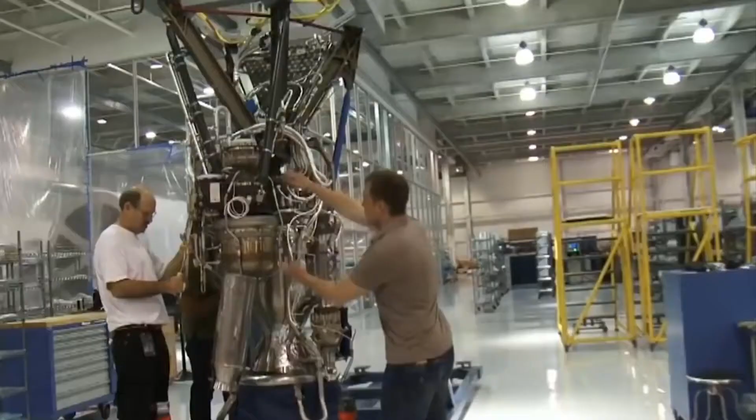Tesla and Elon Musk should be synonymous with the word electric. With the exponential increase at which electrical technology is being used to power almost every engine, we could have all forms of transportation transformed into electric. This would not exclude jet engines.

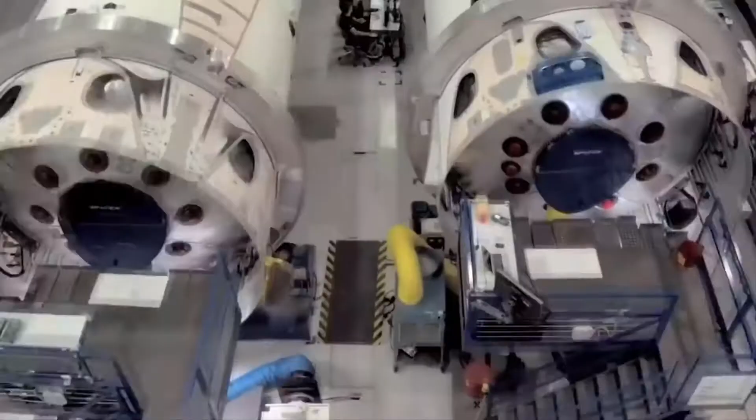Every environmentalist with a voice has had one or two things to say about airplanes and their jet engines and how they affect the environment. But today, we are not here to talk about carbon emissions or footprints. They are bad for the environment and increase global warming, but that is not the focus here.

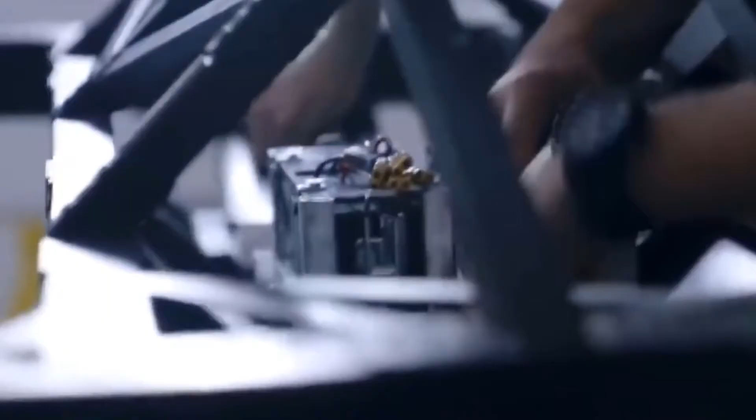Electric cars are the rave and focus for everyone right now. That might be because airplanes only constitute around 2.4% of global carbon dioxide emissions as of 2018. Transportation accounts for 24% of the total global carbon dioxide emissions, and 72% comes from roads. So in a bid to save the world and preserve the green, electric cars seem to be much more important right now. But it doesn't mean that the change isn't coming to airplanes and jet engine powered vehicles.

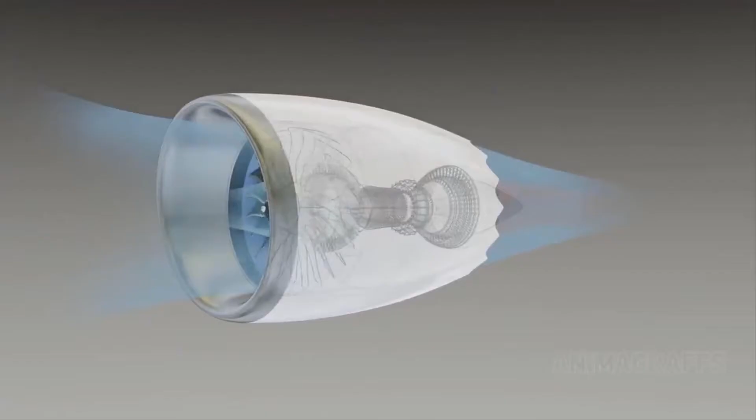How do conventional airplanes work? Regular airplanes are usually fitted with propellers, engines, and wings to generate something known as lift. The forces acting on a plane that could be manipulated to fly are lift, thrust, drag, and weight. The forward motion of the aircraft generates lift through the air. This forward motion is created by thrust from the plane's engines. So all conventional aircraft, helicopters, vertical takeoff and landings, jet airliners, or turboprops use combustion engines.

In electric planes, the principle wouldn't be any different. All that would change is that these combustion engines would be replaced with electric counterparts and batteries. Rockets used to launch satellites into space might still be running on combustion engines and principles because it requires a tremendous amount of thrust and energy to launch them out of the Earth's atmosphere. Trying to replace rockets with battery-powered counterparts would be one giant challenge.

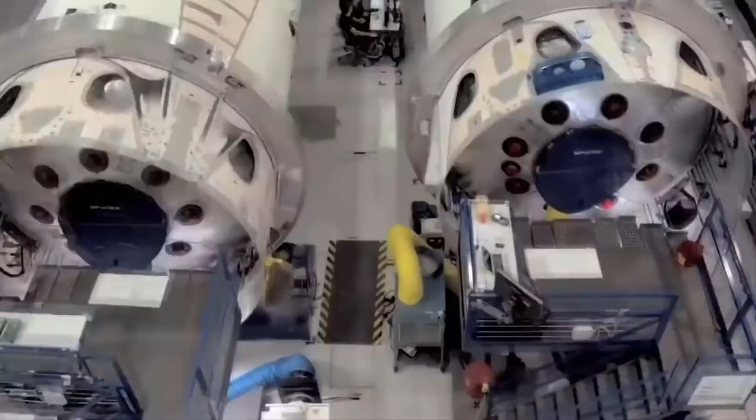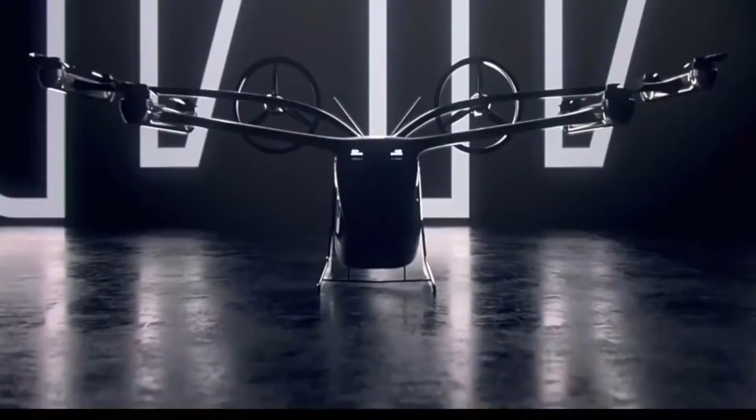Electric airplanes? Yes, this is possible. There are already electric airplane programs. While the programs might be far from introducing one into the commercial sector, electric airplanes are a thing. Electric airplane programs like Siemens and Magnus' E-Fusion, Pipistrel, and Alpha Electro all-electric plane are ongoing, and some even have prototype models that have been tested. For example, Harbour Air flew a fully electric seaplane for 15 minutes. This is the first step towards transforming its 40 planes. Electric planes are viable and feasible.

Elon Musk has made his intention to create or build one known since 2010. In his cameo in the Marvel movie Iron Man 2, he said, "Got an idea for an electric jet." Now this might have been a joke at the time or something he said to fit in the mood since Iron Man is all about futuristic tech, but since then, Elon Musk's company Tesla has been at the forefront of battery technology and has pioneered electric-powered cars.

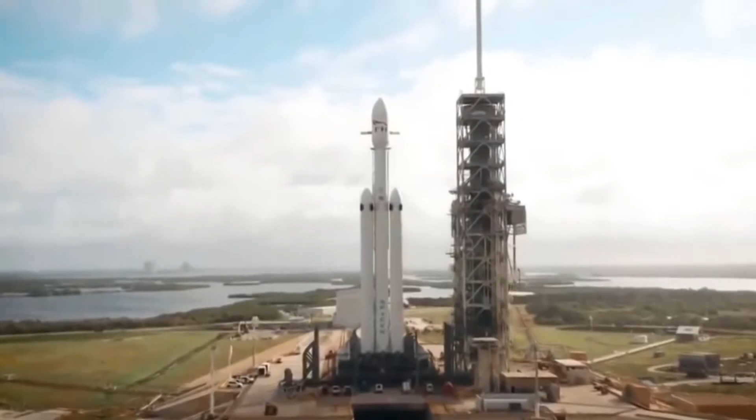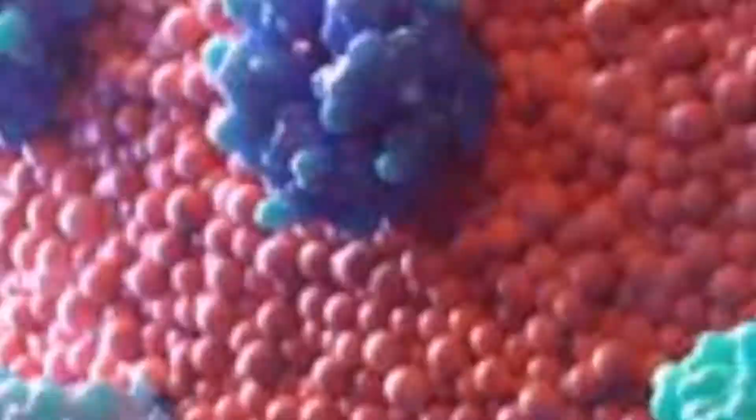So why don't we have electric planes yet? Cars already run on batteries. We even have trucks that run on batteries like the Cybertruck. So why can't we have electric planes like cars and trucks? Well, the answer is we aren't quite there yet, and the tech is still in development. When Elon Musk was asked about the potential advent of electric planes, he gave a timeline of about 4 to 5 years, and that was back in 2019. With the COVID-19 pandemic slowing down everything in general, we might have electric planes operating commercially in the next 4 years. So why don't we have electric planes yet?

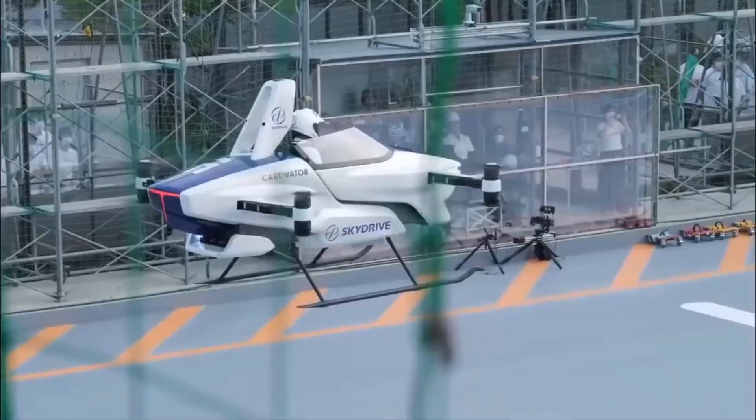Electric planes might have the advantage of being less noisy and having no carbon footprint on the environment. However, there is still a better and more sustainable technology. Combustion engines will still rule the skies. Combustion engines have an advantage over batteries that are currently in operation. This is because they can produce more energy density. The minimum energy density required to operate planes is 400 Wh/kg.

Most battery cells with high cycles have just about 300 Wh/kg, and this energy density isn't enough to fly electric airplanes. For batteries to be viable and cover the average distance combustion engines could cover, they would need to have energy densities higher than 400 Wh/kg. Tesla is at the forefront of battery technology, so it won't be a surprise if they come out with a battery that could handle powering airplanes. If Tesla does develop these batteries, it might make their cars last longer on the roads and have more mileage.

Is Tesla working on electric airplanes? Tesla is a company focused on bringing electric vehicles to everyone's doorstep, and their partner company, with which they share the same CEO, SpaceX, is heavily invested in aerospace technology. With their success with all the electric car models, Tesla does seem to be the right company that would pioneer the electric airplane. But sadly, that doesn't seem to be the case.

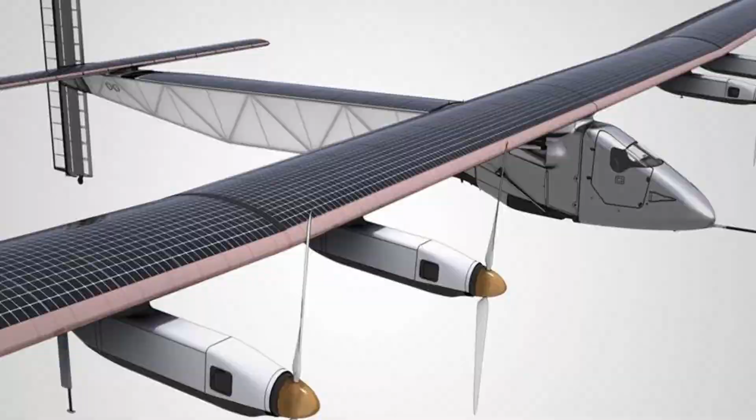Other companies seem to be way ahead of Tesla and are producing or working on these electric planes. Most of them are unveiling electric VTOLs and even showcasing working prototypes of some of their models. As of 2017, we already have an electric aircraft that circumnavigates the world. The plane is known as the Solar Impulse 2, and it has made history. So far, Tesla hasn't made any plans or announcements with regards to electric airplanes. They haven't even released renderings for a design. In 2019, a commercial electric-powered test flight did take place in Canada with Harbour Air.

If Tesla is working on an electric airplane, there is so much excitement about developing one that it can't be kept under wraps. It seems Tesla is focused on developing their electric cars and making them last longer on the roads. Elon Musk has expressed his intentions to create electric airplanes, but he cites that the battery technology is not available for volume production yet.

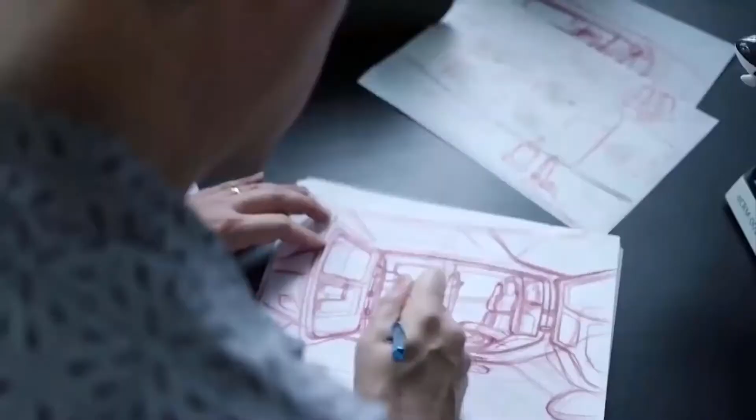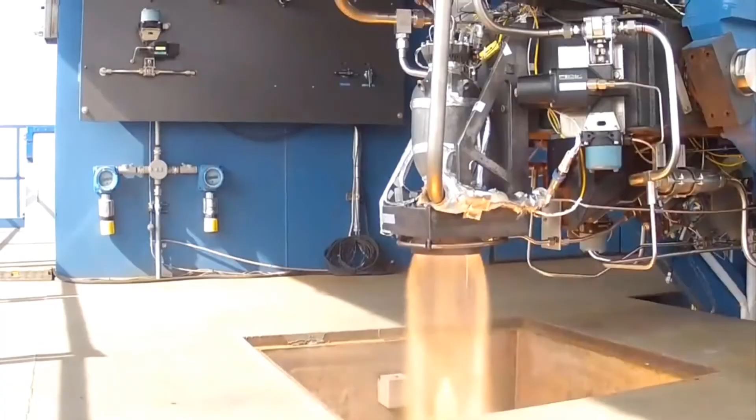There has been chatter on Twitter regarding the movement of a company, Amprius, from their location to just a few blocks away from Tesla's Kato Road facility. This company specializes in silicon nanowire technology that is vital towards creating battery cells with high cycles. And while this might seem to be a move to facilitate collaboration and produce batteries with higher energy densities, Tesla doesn't seem to be working on any other technologies that would go into building an electric airplane. The systems are so complex that just having a battery ready isn't everything they need. They would then need to design more efficient engines, bodywork, and test out a variety of different things. All of these technologies could be worked on while Tesla keeps improving its battery energy densities.

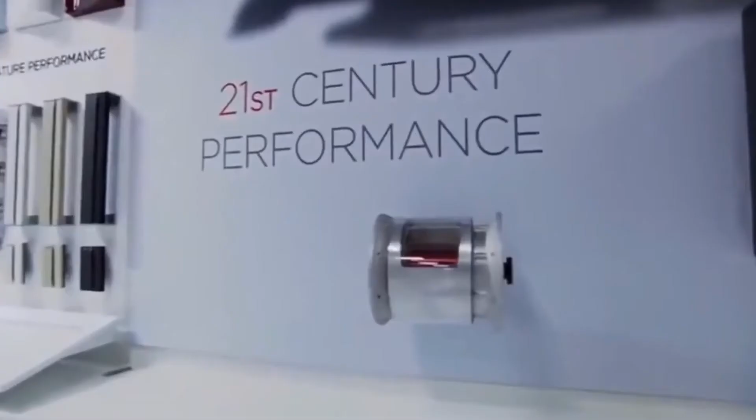Tesla doesn't seem to be invested in seeing electric airplanes come to life as a company, but they remain at the forefront of battery technology and might end up supplying the batteries that many of these startup companies would incorporate into their models and prototypes. Tesla might not be actively working on electric airplanes now, but their battery technology would significantly contribute to the overall technology development. Elon Musk wouldn't stop talking about his excitement for the potential of electric planes. In an interview in 2016, he revealed that he already has a prototype design for a vertical takeoff and landing vehicle. His company Tesla seems to have grander plans that don't involve working on an electric plane at present.

Prototype electric planes are already around, test flights have been carried out, but they don't seem to be ready for commercial usage yet. Many of these startup companies working on electric flying machines are receiving funding and investments from investors that see electric airplanes' potential in aviation's commercial sector. In the next 3 to 4 years, we could see commercial electric airliners come to life. We might even get to board them and marvel at the technology, but they might not be made by Tesla. If electric airplanes make their appearance in aviation's commercial sector, it will affect all transportation forms. We should expect to see more EVs around and see the beginning of a culture that could mean a cleaner environment.